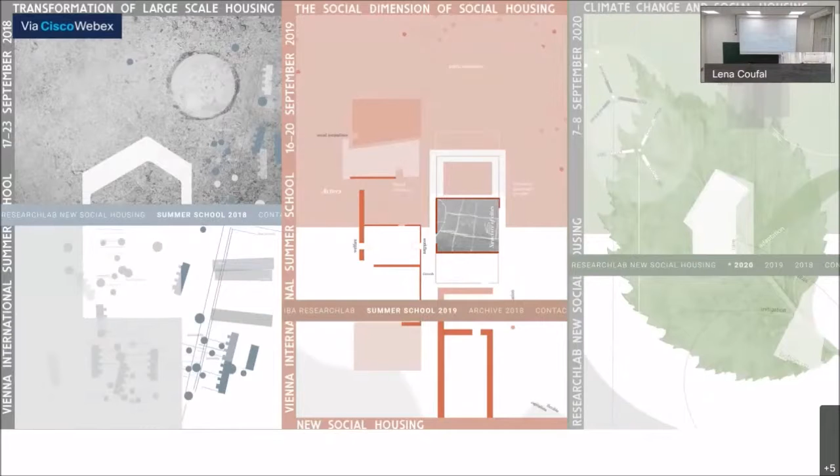This is how we came about to look at climate adaptation in social housing, and we put a particular focus on local and bottom-up perspectives on this challenge, or on this task, from various continents, and we asked ourselves and participants a number of questions regarding these projects, or this thing.

One of the things that is the main job of such a research lab or summer school is to learn from existing research. What do we know? What is the state of the art on this thing? We ask this for us as researchers to learn from each other, but also because we want to transmit this knowledge to policy here in Vienna.

So after these sessions, we want to have some points that we can share with decision makers and policy makers here, that they might consider when they move towards 2022, and are looking for answers on what new social housing could do.

With regard to this, there were three more specific questions, and we organized various sessions around these. One is this: if we look at local and bottom-up initiatives, how they come about, and more crucially, how can they become sustainable, so that they're not one-off, but that the communities that emerge, the empowerment that takes place in this process, is sustained. For the city of Vienna, or for us here, it's a crucial question related to this: how can public institutions actually respond and support such initiatives and processes.

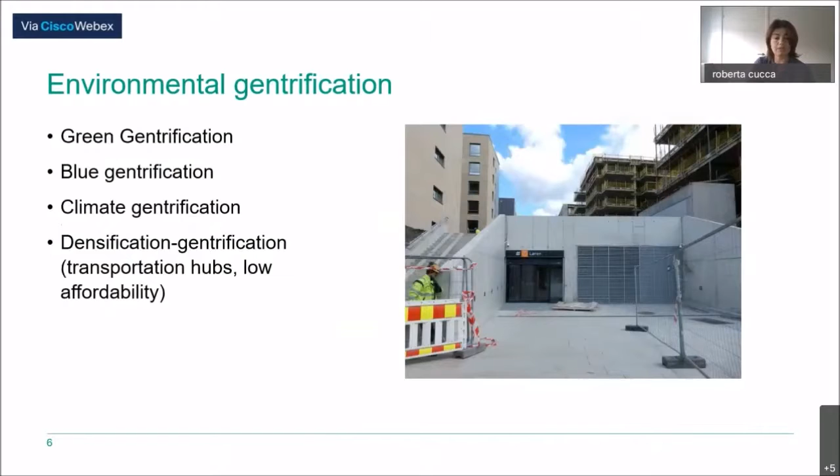And of course, the most important aspect we can see is the increasing cost of the housing market in the buildings characterized by ecological retrofitting.

Very few words about emerging good and transversal practice and regional variations. Here also the literature is starting to highlight some good and transversal practices, with a very strong regional variation.

Again, I try to answer with the same question. This variation depends, of course, on many context-related aspects. First of all, what kind of coordination there is, if any, between housing policies and green planning strategies.

If green planning strategies, for example, are associated with housing policies oriented to provide affordability in that area. And also it depends on housing policies that are able to scale up the sometimes badly defined bottom-up innovations.

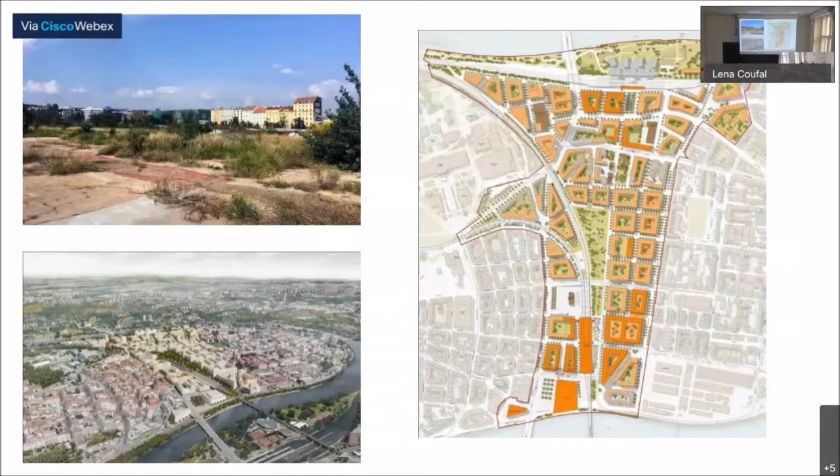In another study, we focused on courtyards for many reasons. The original part of the center of Prague consists basically of lots of buildings, and people used to use the courtyards a lot. These are areas with huge potential for the implementation of green and blue measures, but so far this opportunity hasn't been seized yet on a larger scale in Prague.

These adaptation measures in courts and corridors are actually very cheap, and in the case of green measures, it consists basically of greening - adding plants and greenery maintenance - and that's it.

I'm not sure how we're doing time-wise. Okay.

So we chose 2 courtyards. They were both in a different situation. One was a bit smaller, with very small rent from the town hall and a tiny grant. I think there were less communication difficulties because fewer subjects were sharing the area, and they were very dedicated individuals. So what they did was put in several garden beds that they took care of, and a water tank and so on.

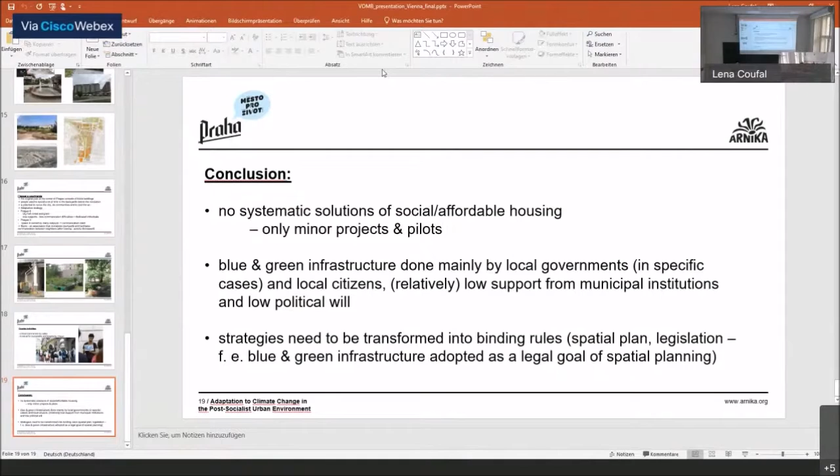Okay, thank you very much for the first presentation on Prague. We're all looking at Prague these days and years because of the political changes over the last years, and we all work with some hope for Prague. There would be much to discuss, in particular, as in the title you presented, there would be actually space for maneuver, but somehow you still seem skeptical about what's going on. But we're now moving somewhere totally different.

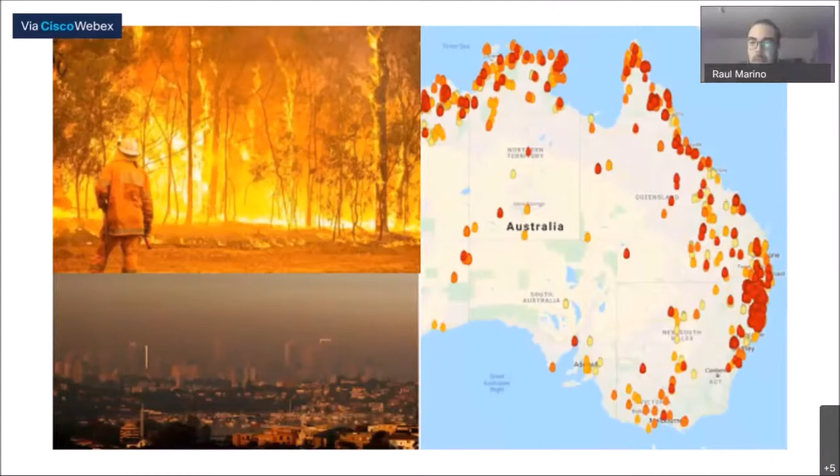As you can see, last year we had one of the worst bushfire seasons in recent history, where sadly millions of hectares of Australia were burned, with a great loss of animal life, and so on. So these are the main drivers that motivated Australia to tackle this and try to address it within a planning framework.

Well, I want to start talking about the scale of urban design and its importance for active community life. It has been said that it's very important for human interaction, and there are qualities in urban space that we want to preserve and promote. Of course, there is all kinds of urban design, from very good examples that are inclusive and participatory, to very bad top-down examples in many cities. But the idea is to use public space not only as a recreational area, but also to have another function.

So, multifunctional uses of public space. The idea is to use it as a platform for environmental recovery. Most of the time, public space is only considered for recreational uses or interaction, but it can be much more. It can be a way to recover cities' ecosystems, a way to improve the water cycle in cities. And if the process is done within a participatory framework, as proposed in the lecture, the more the better. So this is the idea, to try to change the way this is conceived or designed.

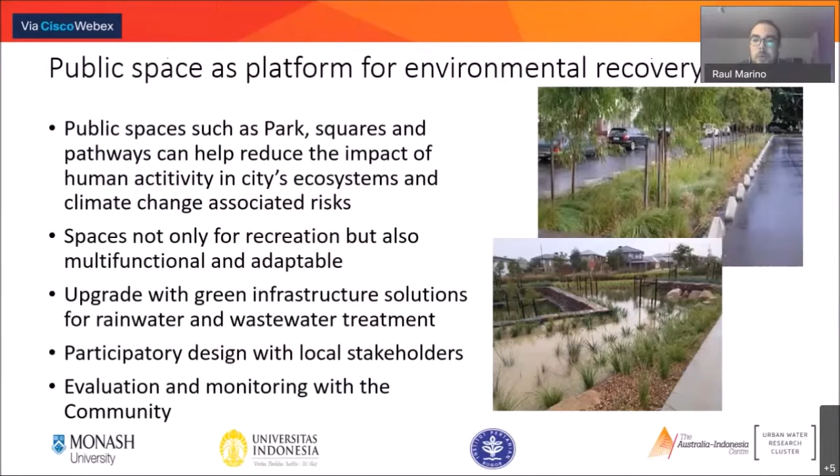Many examples, of course. This one is, I guess, more familiar in Europe - this is Benthemplein in Rotterdam. I don't know if some of you are familiar with this example. It was designed by a studio in the Netherlands called Urbanisten. It has been a very successful example of urban design from the adaptation point of view, as this space mutates during different seasons. During the rain season you have a different configuration, during the dry season it's different, same with winter. So the same space interacts and is adaptable to different conditions. We find this very interesting, and we want to apply these concepts as well - how to integrate adaptation into the design of public space.

Now, talking about the water sensitive design framework - it's based on understanding urban water transitions in cities, from very basic stages of development, a city that is only doing water supply or sewer water, to progressively more advanced states, until finally achieving a city that is, let's call it, water sensitive. The idea is to promote this transition in a sustainable way, in contexts where these stages can be accelerated to avoid undesirable stages of the transition. So we try to apply this leapfrogging key to accelerate the process. In our project, the idea was to jump from very basic stages of cities in Indonesia - cities that only cover water supply and sewerage - to accelerate the transition towards more sensitive urban areas, in Australia as well as in Indonesia.

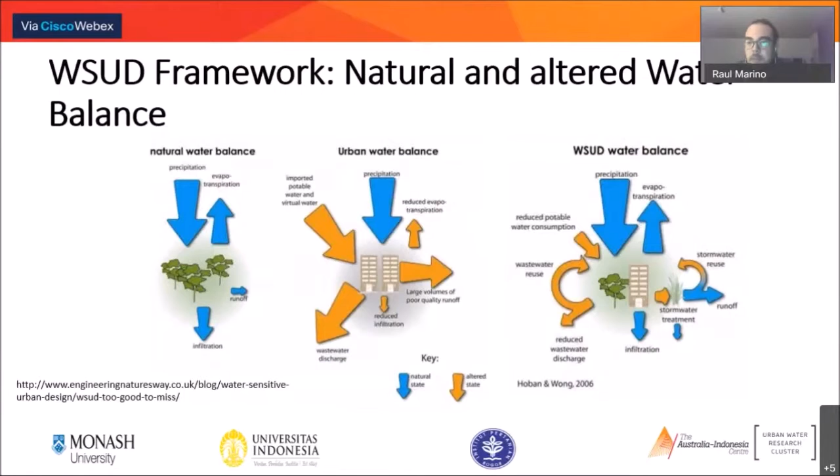What the framework is about is recovering the natural balance in urban areas. When an area is natural, without urbanization, there is precipitation, infiltration, evapotranspiration, and so on - all these important processes for water cycles. But when we build the city without considering its water cycle, we reduce infiltration and completely transform what's happening. So the framework tries to understand this and make it a more circular process, where we reuse wastewater, reuse stormwater, and reduce storm runoff, addressing this from the design point of view.

So from the water sensitive cities perspective, water sensitive urban design is based on an alternative to minimize environmental degradation and improve the aesthetic and recreational appeal of cities, changing the paradigm a bit from considering cities as water drainers or just consumers of water - instead, cities become part of the water supply process, part of the catchment. So cities and all the rainwater that falls in them can become a way of providing different sources of water. That's one of the main ideas - to change the paradigm towards the city as a water supply catchment. There are also concepts like sponge cities being developed in China, focusing on water and water cycles to understand them better.

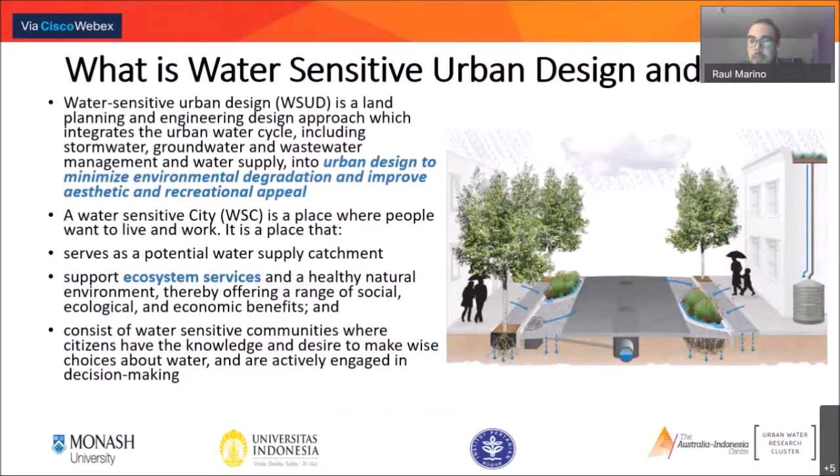And of course, to support ecosystem services, to promote and support everything happening around these important ecosystems for the cities, from ecological and economical benefits, and of course communities that are involved in the process. So a water sensitive city without the communities, or water sensitive communities, is really not working. The idea is everything has to work together in order to be a real change.

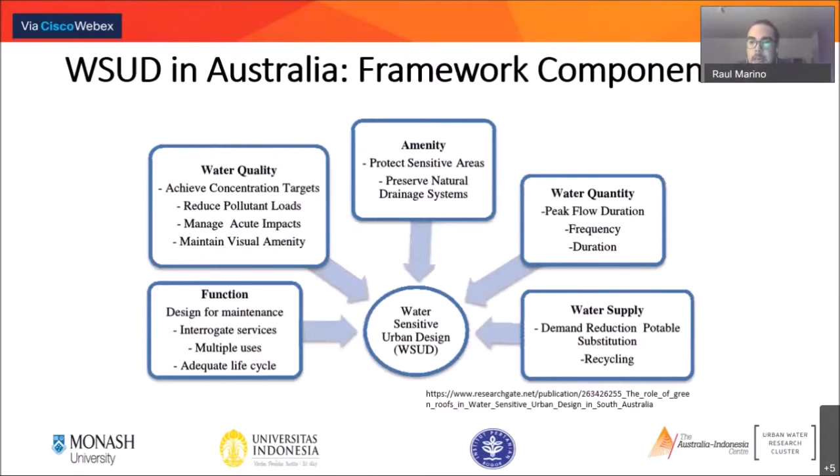And from the water sensitive framework, there are different dimensions, of course, from function, control of water quality, from amenity, water quantity, and water supply. So all of these dimensions are combined, and not only with different disciplines, of course, not only urban design, but also with hydrologists, sociologists, water engineers, all sorts of professionals that collaborate together into making an integrated framework.

And of course, applying all the green infrastructure tools that have been named already here in the last presentation. There were some mentions of rain gardens and rainwater tanks, right? So also wetlands and bioswales and all these different tools that again support improving the water cycle in cities.

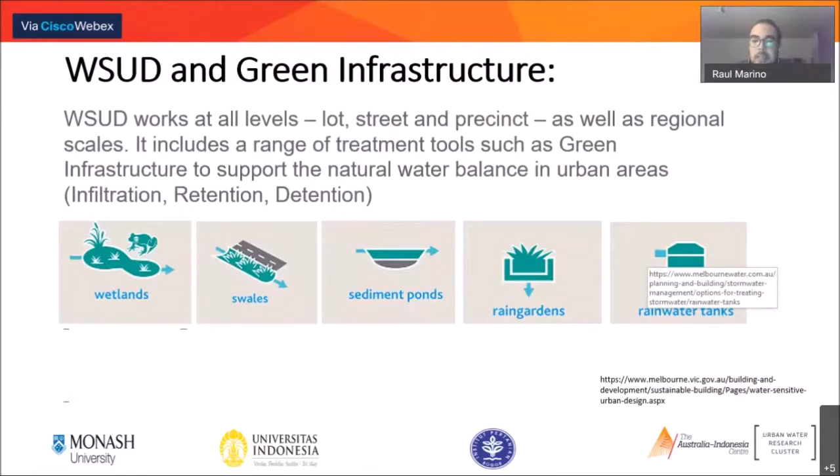And this framework was developed as part of a research cooperational project funded by the Australian government called the CRC for Water Sensitive Cities, or Cooperative Research Centre for Water Sensitive Cities. The four main pillars of this were: influence policy, because without really getting into policy it's not real change that we can do; engaging communities in the process; designing water-sensitive cities; and benchmarking and decision-making, which supports other cities being integrated in the process and evaluating their own progress.

And there are a lot of things related to this that can be found in different places, and there's some adoption of this water sensitive framework. There are incentives for doing it, for example, from development rights, tax cuts or accreditation. The framework is not mandatory still in Australia, but there are incentives that the government is offering for local governments to include it.

And now I'm going to talk about our case study in Jakarta, or the city of Bogor. Jakarta is a huge metropolis, what they call Jabodetabek, the junction of many municipalities around Jakarta. Bogor specifically is one hour from there, located on the island of Java. The island of Java itself has 120 million inhabitants. So you can imagine the amount of stress and pressure that this puts into the environmental systems - you have to provide for 120 million inhabitants on just one island.

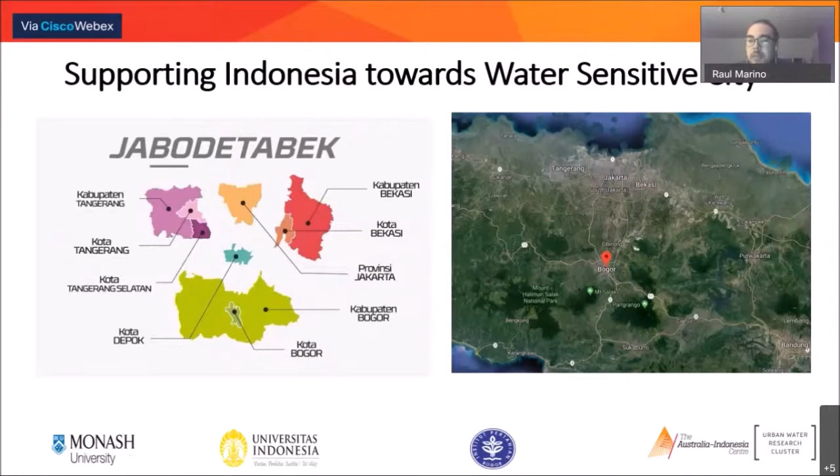And of course, at the scale of the city, this creates additional challenges in water supply, water treatment, and everything related to these cycles. So the pilot study I wanted to present now, one of our case studies, was in an area called Pulo Geulis, a very interesting urban setting - an island located in an urban river called the Ciliwung River in Bogor.

And the idea was to support this participatory process for the implementation of the upgrading of the green technology. I'm going to show very quickly some of the process, because I know we have very little time, but there's information about it in the paper and other links as well.

Again, the context of the island - this is the area of the project, an island of 3 hectares with a population of 2,600 inhabitants. The island had in the beginning some social housing that was transformed into or integrated around an informal settlement, so the original social housing is no longer distinguishable from the other houses built in the process, and that is the way most of these informal areas in cities evolve.

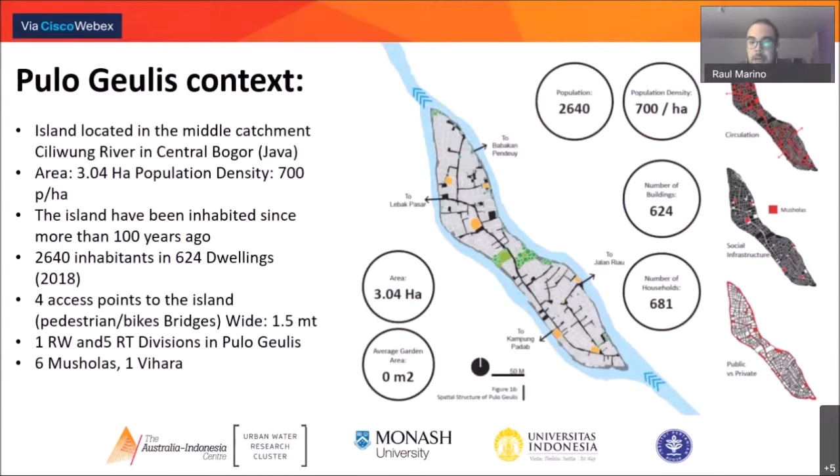And of course, many issues related to water, especially water pollution, because most of the houses don't have water treatment for wastewater, so the water is thrown into the river directly. There's also lack of access to water supply, limited accessibility, erosion from the river, and other issues related to economical disadvantage of the area.

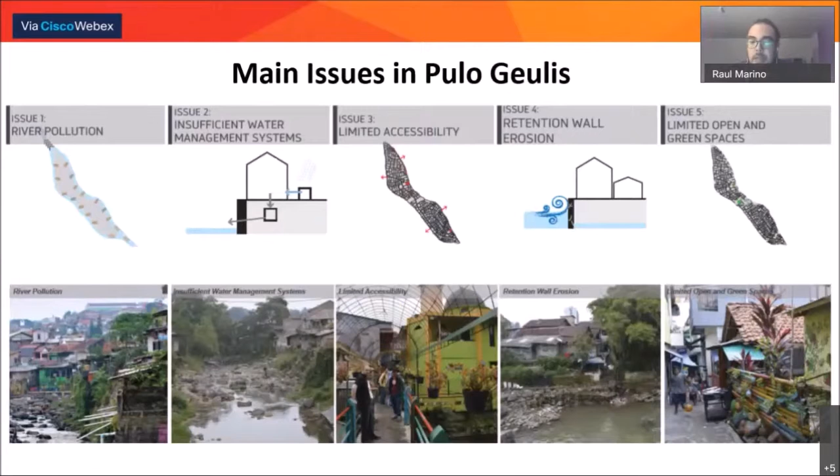So what we wanted to do with this participatory process was first to understand the conditions of the island, working together with the community. I'm going to describe very quickly these steps of the process.

First, what we call a visioning FGD, or visioning focus group discussion, where we have different tools like community mapping, problem solution trees, and so on, trying to collect from the community what were the main issues, what are the ideas for the transformation, what they're expecting, what is their vision for the future, and try to build on that vision for the community in our project.

After that, as the area didn't have any sort of physical or information on maps or plans, we had to make the whole measurement of the area in a different way. So with mapping of the area, we created a digital elevation model that was needed to make all the calculations for our design. It was later post-processed in 3D.

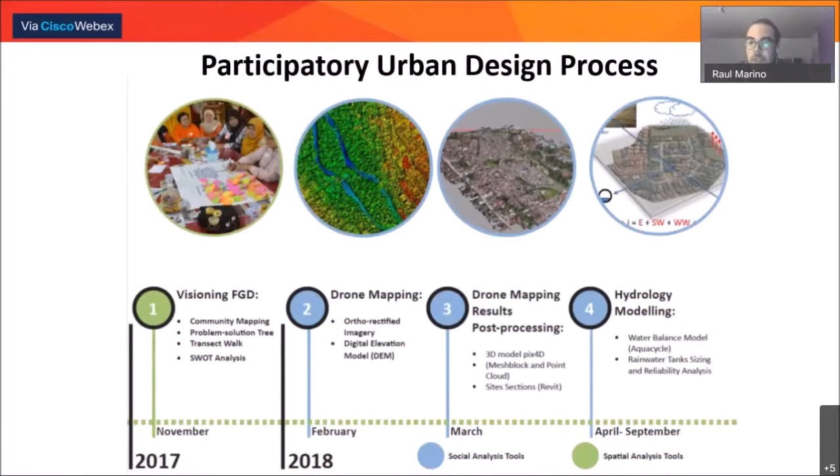And of course the hydrological model to support all the interventions in the island. After this, we have a series of urban design scenarios where we're showing different scenarios for the island together with the community, discussing which scenarios can be more suitable for them, better for them in terms of their own development, followed by a series of interviews and surveys, and finally an urban design workshop where we came back to them and refined the final designs with them.

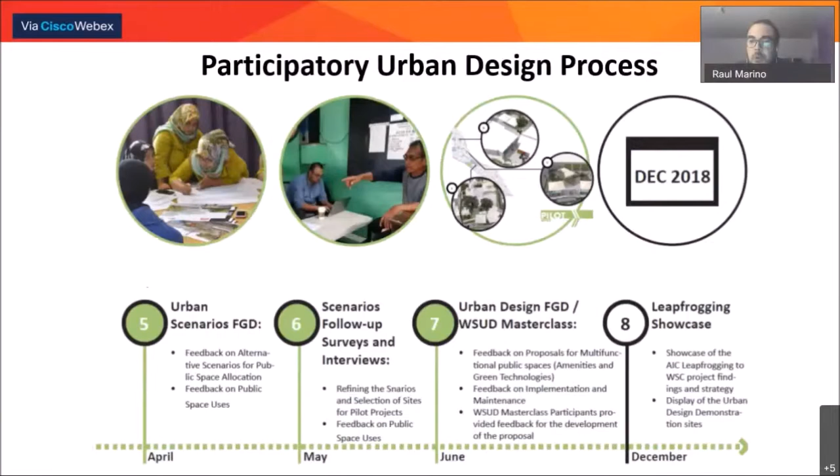So this is one of the main things that I think was good in this project: the process was done from the very beginning to the last conception of the design together with the community, learning from the experience, because of course they know the areas better, and taking advantage of the social capital that is already built in the island to promote their own recovery.

Our urban design approach was based on an integrated approach where we were providing the necessary infrastructure to improve community health and environment, while we were upgrading the public space network.

One thing I forgot to mention is that there was almost no public space in the area. It was so crowded and so dense that there's no public space, so we needed to create some public space out of nothing. It was very challenging in this concept. So we tried different alternatives and how to recover the public space in which we can make our interventions.

The second concept was adaptability, thinking about future changes related to climate change and population growth, with spaces and green infrastructure that is adaptable and flexible. And again, co-developing with the community and stakeholders for a better chance of success of the project by involving the community.

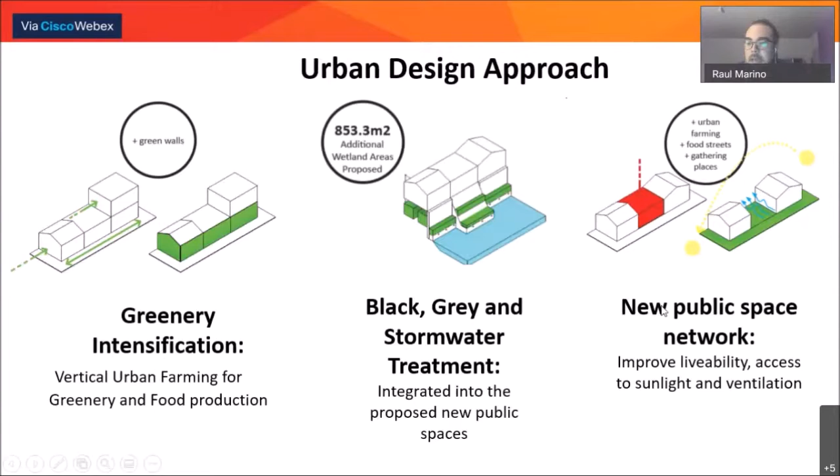This was translated into a series of urban design concepts: intensification of the greenery using green infrastructure tools, also vertical farming and greenery, and treatment of black water, gray water, and stormwater, mostly with constructed wetlands that were cleaning the wastewater before it was thrown into the river or reused in the households. And of course, creating a new network of public space in the city to improve livability and access to sunlight and ventilation that was needed in the area.

So we came up with different alternatives on how to mix all these concepts. We created this multifunctional public spaces matrix, where we have different layers: the first layer of activities such as play, exercise, and leisure, a second layer of elements like furniture, shading, lighting, and so on, and a third layer of green technologies that we can apply in the area.

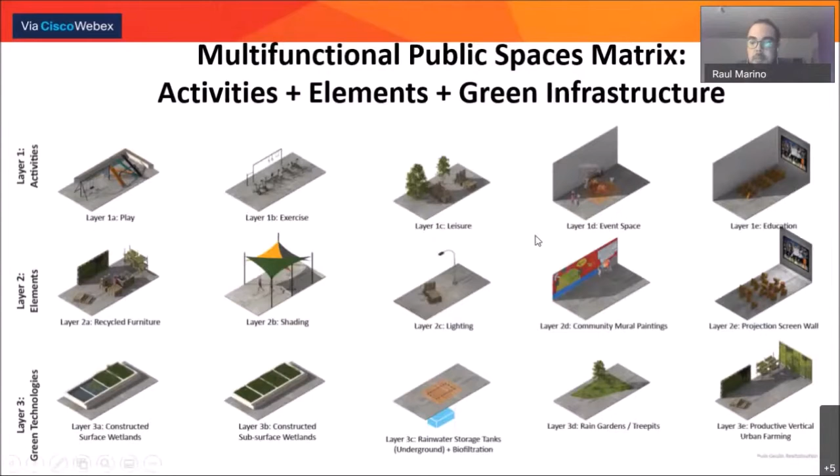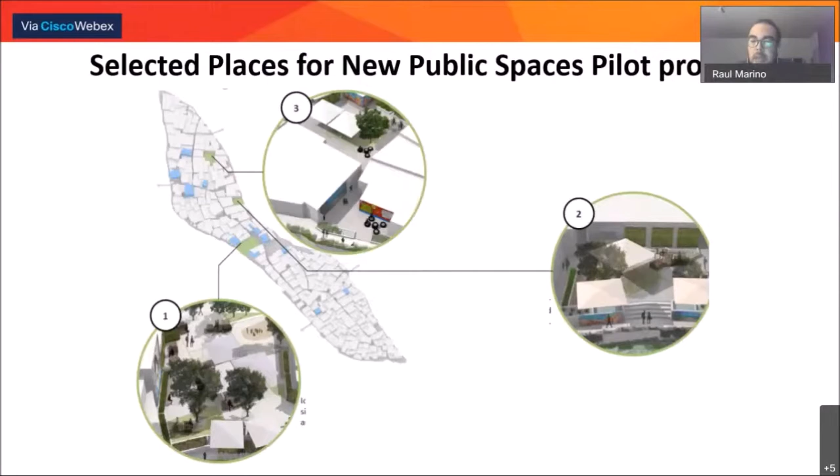So within this matrix, we created different combinations of the spaces, and we selected three pilot projects to apply all these combinations. I'm just going to show very quickly some of them.

This was one of the main spaces, or the only sort of open space in the island, which was not public - it was just an empty plot of land. So the idea was to acquire this piece of land with the community, with the help of the government and funding, and transform this open piece of land into something that is actually improving the living conditions of the people in the island.

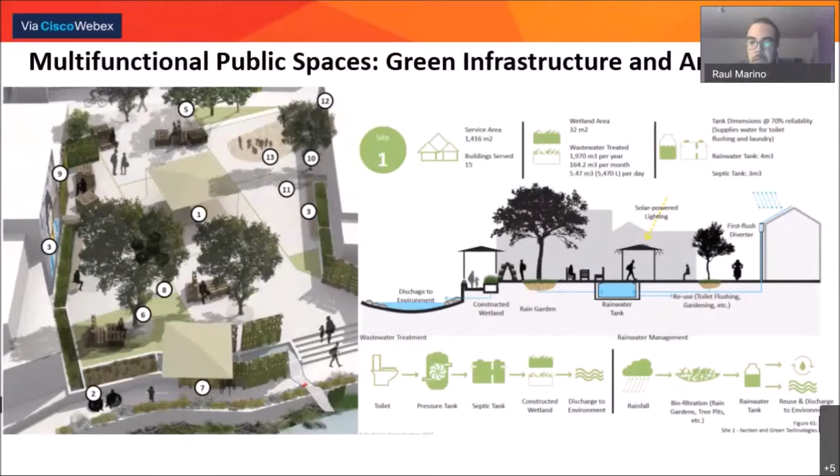Here we can see all the different green infrastructure tools that we applied, focusing on solving the main issues of water pollution, how to make the treatment of the water using constructed wetlands, collecting the rainwater and treating it with biofilters and other technologies to make the water reusable, perhaps not for drinking purposes, but for other purposes that can be used in the island.

And of course, we understood that this is a process that takes many phases to implement. So we try to plan the short-term, medium-term, and long-term goals or projections on how to understand this infrastructure as a scalable infrastructure, starting with pilot projects and building on that to scale up.

We found a lot of regulatory framework barriers and institutional fragmentation at state and local governments. First, it was not very clear which regulatory frameworks we needed to obey to apply this technology. So it's very important that this framework is clear, inserted into local policy, with coordination between local and federal governments on responsibilities.

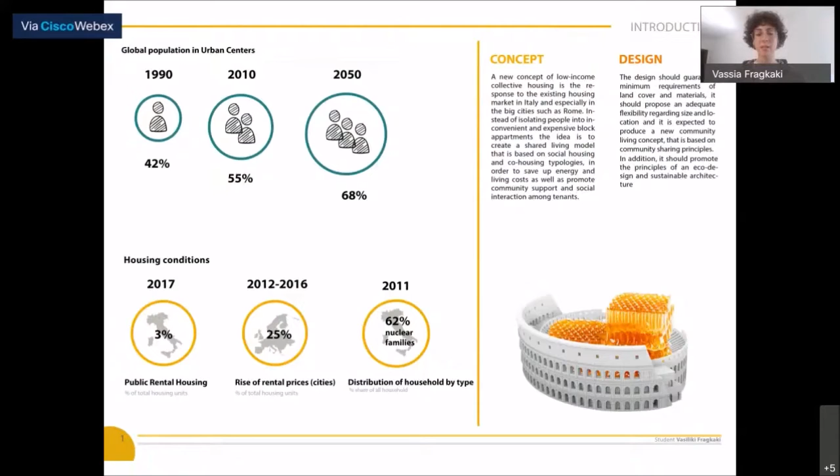So to introduce you a bit to the urban context, the project area is in the San Lorenzo neighborhood, which is really close to the historical center and just 10 minutes walking from the central train station, the Termini. The neighborhood is mixed-use, since we have the university campus of Sapienza on the north side of the project area, while the rest of the neighborhood is a mix of residents, shops, and public administration buildings. It is a really well connected area by means of transport, since it's close to the historical center and the train station.

And regarding the urban green, we see that there are sufficient, let's say, green spaces, but not really big regarding their surface.

The dots represent the communal orchards or the community gardens—unfortunately I don't have the map here, but I can share a link in the chat. It's one of the main elements that inspired my project, because hopefully the city of Rome in the last years has adopted this mentality of creating a lot of community gardens and urban orchards. Some of them are formal, some informal, some are occupied spaces, private or public initiatives. So there's a lot of gardening culture in this city.

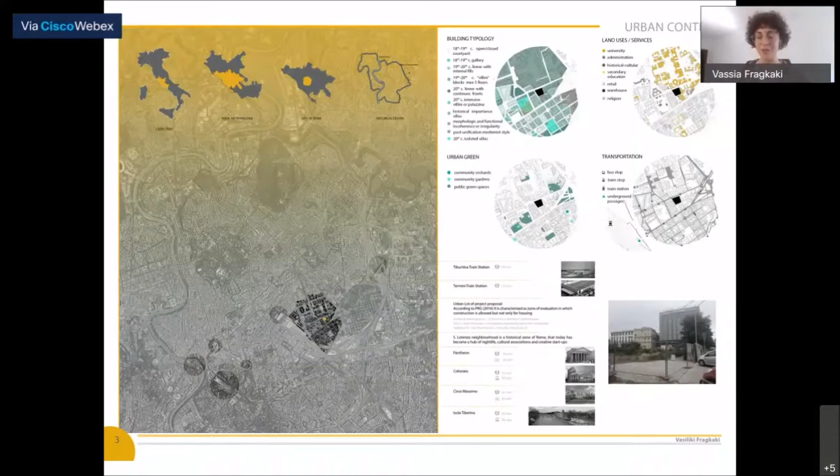The dwelling concept is the main one, the principal element of the whole project, because I wanted to minimize the private space in order to give more space for the collective and shared functions, and in this way create an adaptable and flexible space for the needs of every user.

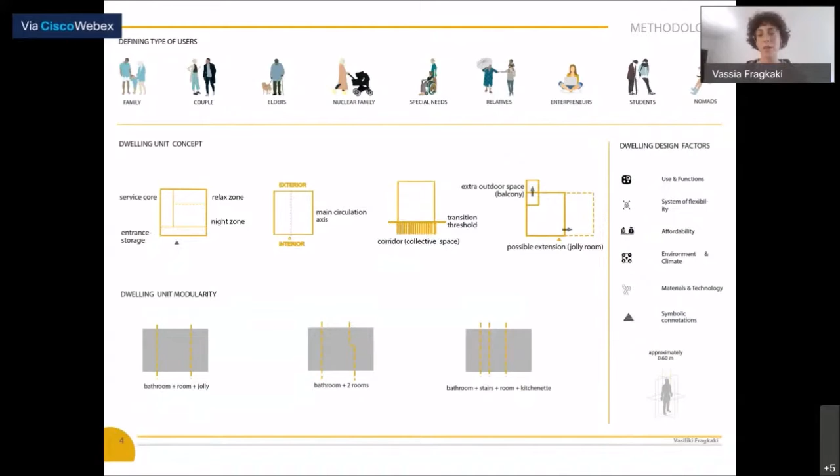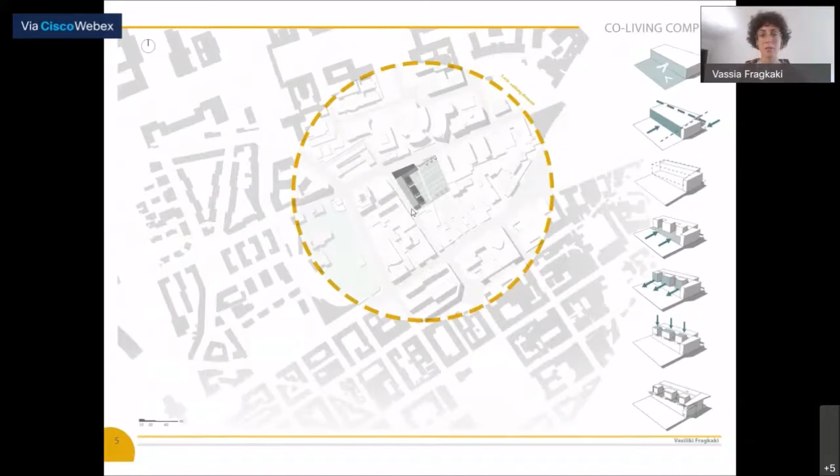Here you can see the project area and the massing concept of my building, and here is a zoomed view.

I decided to dedicate most of the lot space to green infrastructure. So basically we have two separate buildings. This bar-shaped one hosts all the private units and the shared spaces like the laundry. We have a small library and kitchens, and this is a projection space. Then we have the long green living room, or the patio, that I'm going to show you further on.

Here is the co-working space, which can be used by the residents and also by people from the neighborhood. Here we have the gardens of the project area, while the rest is dedicated to urban gardening, urban orchards. There is also a place for bicycle parking, and this is only a temporary car parking, because I wanted to promote sustainable alternative mobility in the city.

Here we have the storages for the gardening equipment, and here you can see three greenhouses that can also be used as an events hall or for organizing other kinds of activities by the tenants. This diagram shows also the spatial zones that represent the thermal zones.

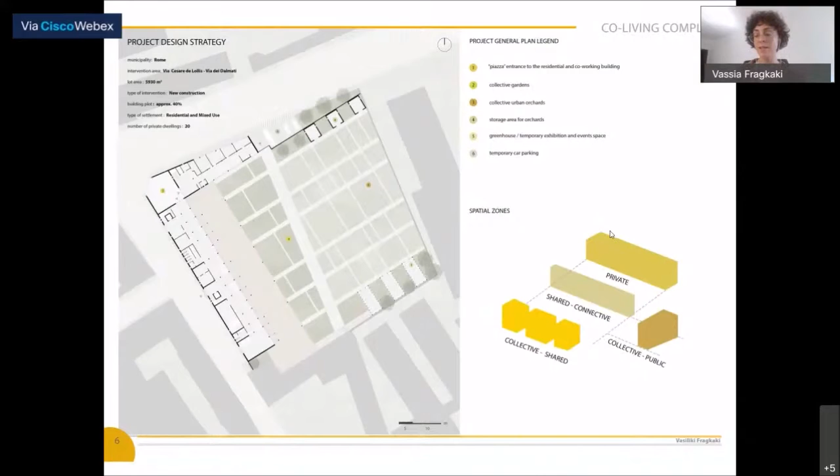It's a compact design that allows better management of the thermal gains and thermal losses of the building.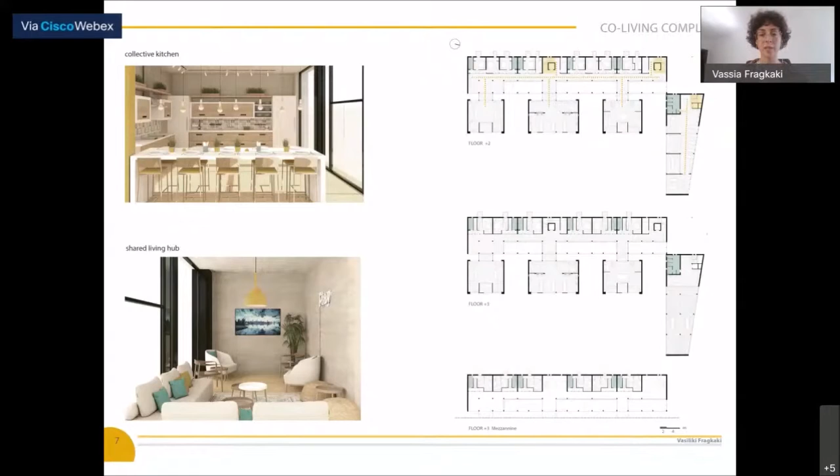And here you can see the view from the terrace of the co-working space towards the gardens and the urban orchards, and the view of the three greenhouses.

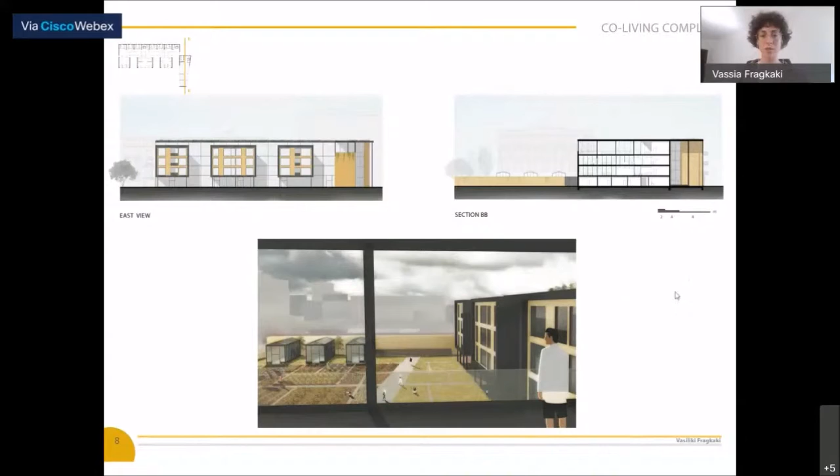And here is another view from the inside of the gardens and the urban orchards.

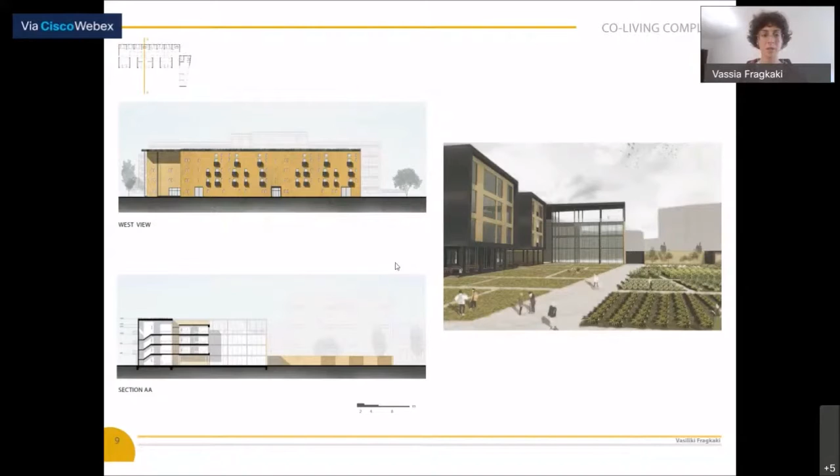On the bar-shaped building, there is also a green roof where solar panels are installed in order to use the energy, and the green roof also helps with the retention of rainwater.

Here you can see the green living room that I told you about—it's the patio, on the ground floor, and all this opening creates an open space and relation to the outdoor space, and brings in natural ventilation, cross ventilation, and also natural light.

You can see the view of the co-working space.

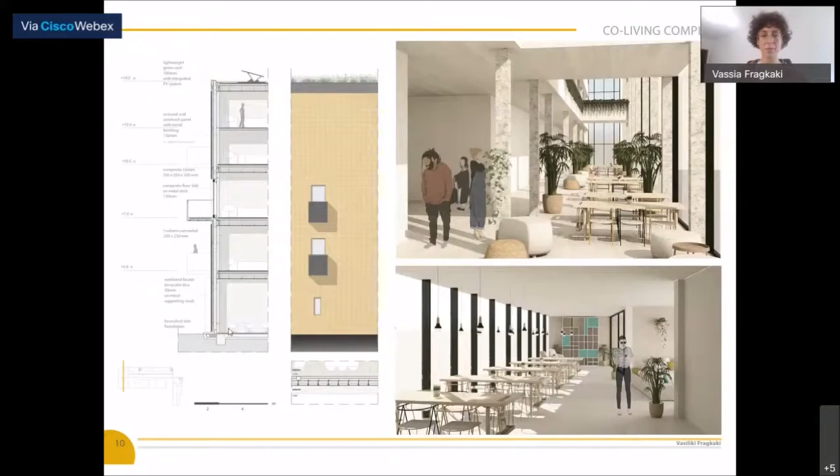The patio is also used for natural ventilation and illumination. There is the naturally ventilated facade, and those galleries also allow the flow of air and give the opportunity of shaded outdoor space for the users.

Regarding the green roof, it increases the thermal inertia, it filters the rainwater, and it enhances the local microclimate, and also reduces the urban heat island effect, which in Rome, unfortunately, as in many big metropolitan cities, is a really present effect.

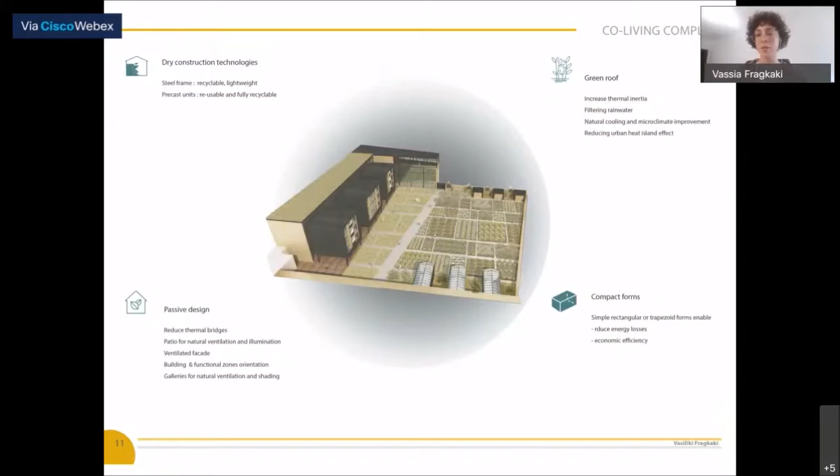And use it also for irrigation of the urban orchards. At the same time, there is a grey water treatment and reuse for the showers or for the washing machines.

And the orientation of the building is considered in a way that the more collective spaces face southeast, so we have more illumination, while the private dwellings face northwest. Also, these openings between the building volumes allow better flow of air and better ventilation of the whole building.

So basically, the idea was to minimize living costs and save energy, not just by adopting several environmental design principles and technologies, but also by trying to arrange the spaces in a way that allows us to have a more efficient and better functioning plan of the spaces.

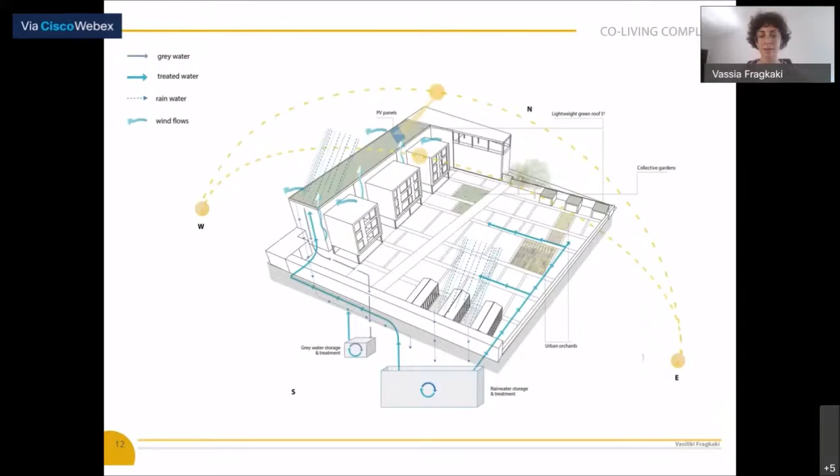That is for me. Thank you.

Thank you, Vassia. Now we have quite a challenge ahead of us. We have three very different cases, each really interesting and exciting. I wrote down many questions and issues I'd like to explore deeper, but I need to let the more distinguished people on the panel discuss and question what they've just heard. Roberta, Sasha, and Fran, who would like to break the ice?

Okay. Yep. Sasha, it looks like you're ready to comment.

Yeah, I can try to start. Thank you so much. It was really super interesting to follow these three very different presentations, and maybe to start with, what intrigued me in particular in the first presentation were two things.